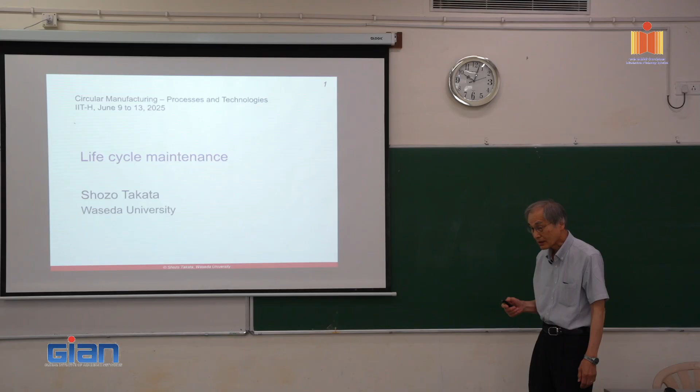Good morning, everybody. In the program, the title of my talk today is life cycle management. But maintenance is a part of life cycle management, and a very important part of it. That's why I'll focus on the maintenance issues.

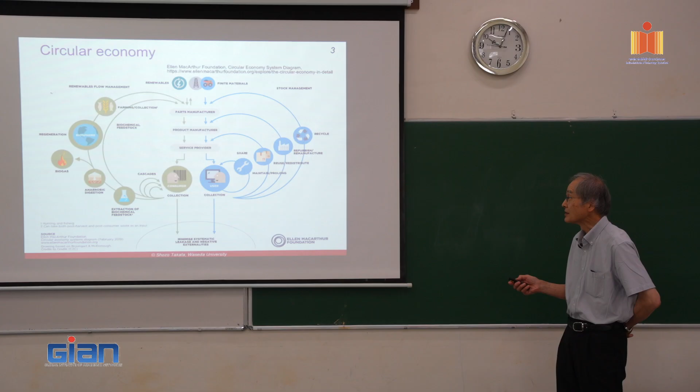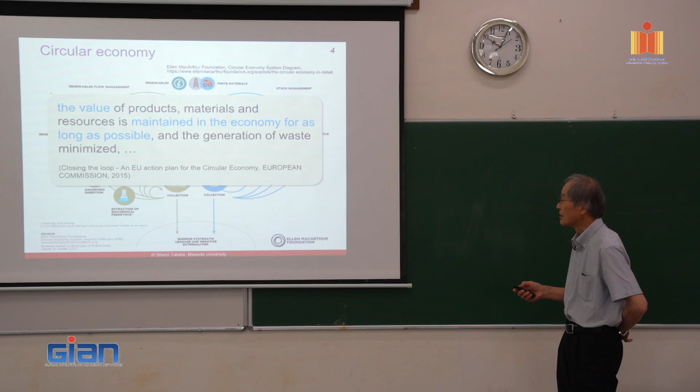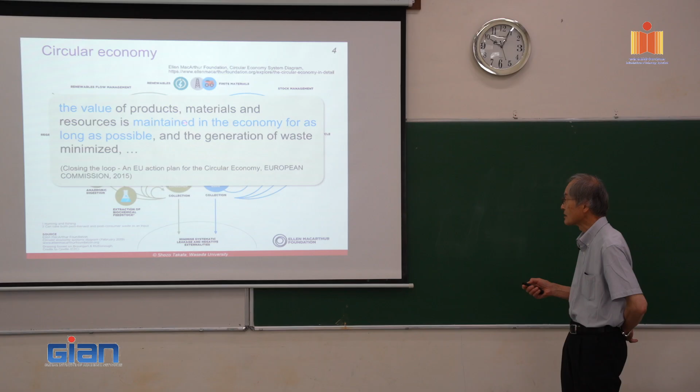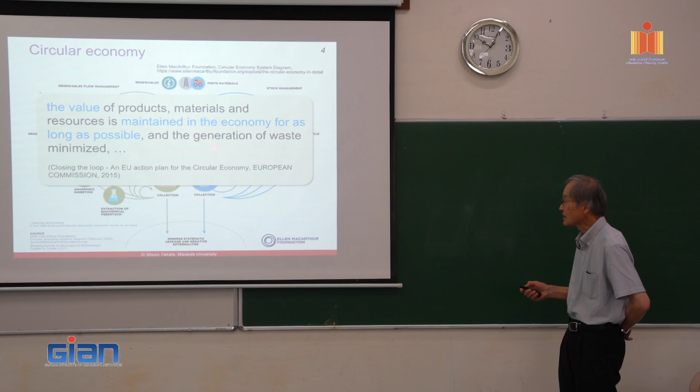This is something I've shown many times in my presentation, and the circular economy was stressed by an EU action plan for the circular economy. This is a very famous paper saying that the importance of the circular economy, and in this document there is a description: the value of product, material, and resources is maintained in the economy for as long as possible, and the generation of waste minimized. So this says that maintenance is a very important part of the circular economy.

There are many kinds of artifacts or things to maintain, and maintenance is aimed at making best use of artifacts through their life cycle. So how can we extract the capability of the products or facilities, regardless of the area - infrastructure, industrial machines, home appliances, and so on.

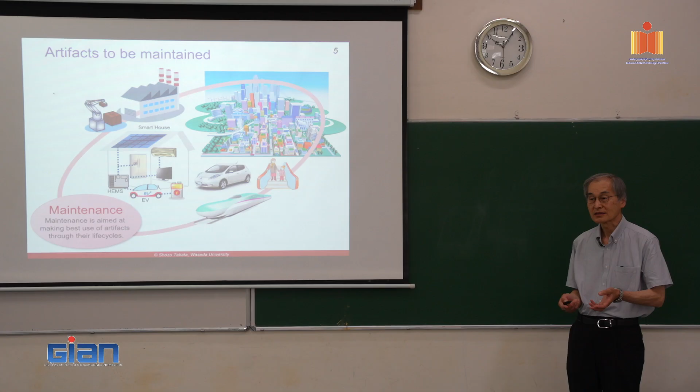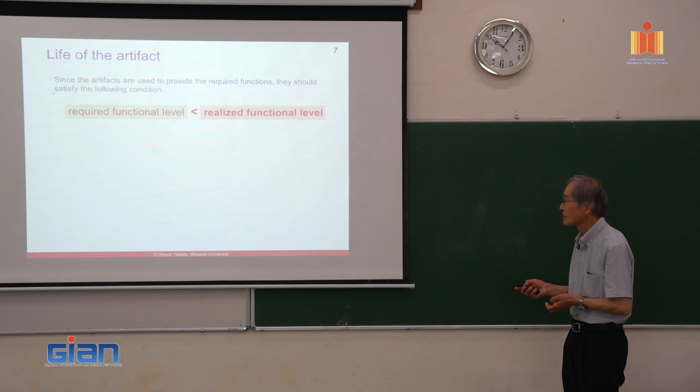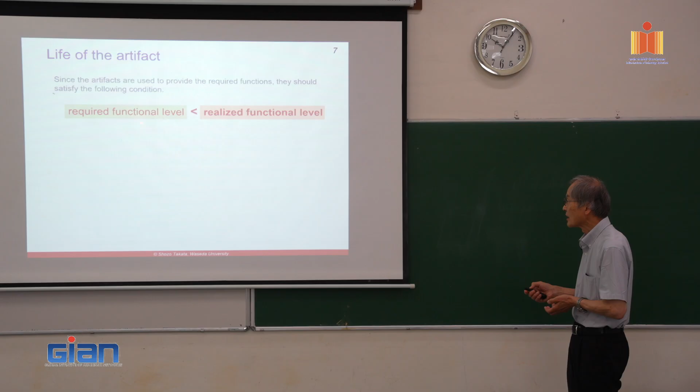First, I want to talk about the framework for life cycle maintenance. There are two kinds of lives of the artifact, and the artifact is required to have a good functional level larger than the required functional level. So the realized functional level should be higher than the required functional level.

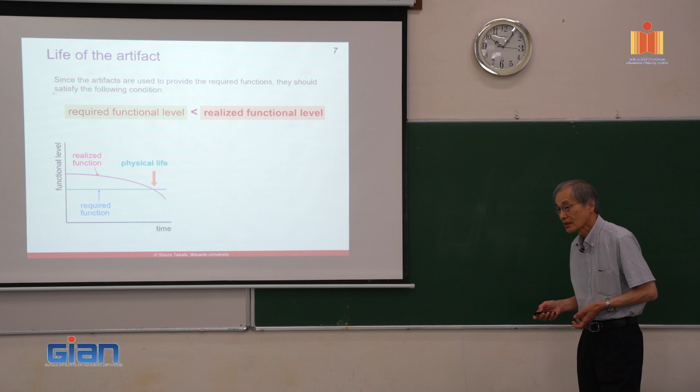There are two cases where the realized functional level goes under the required level. One reason is the deterioration of the product or facility. The other case is that although the realized function deteriorates, at the same time, before it goes down, the required function goes up. In this case, we say the life is physical life, and in this other case, functional life or value life.

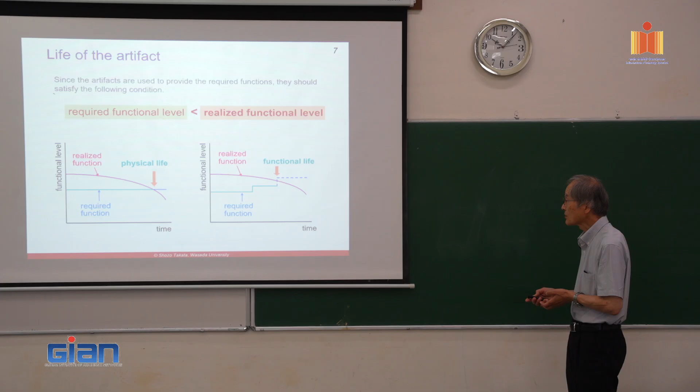So what are maintenance activities? Usually, when the system starts to be used, there could be different kinds of malfunctions or failures or not-good things, and you need to improve it to a usable stage. Then, while you use or operate the product or facility, it could deteriorate - the function level will deteriorate.

But before it goes below the required level, if you make some kind of treatment, that is called preventive maintenance, or PM. On the other hand, if the treatment happens when the function level goes below the required level, which means failure, then we call that kind of maintenance breakdown maintenance.

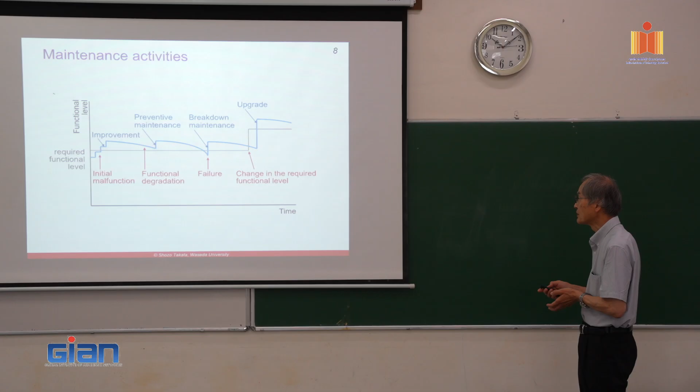Also, there is a case where the required level increases, goes up, and for responding to this type of change, you need improvement or upgrade. All these activities to respond to these kinds of events are called maintenance.

But why do we need maintenance? There are several kinds of reasons. One is expected deterioration - from the design of the product or facility, this component may deteriorate due to the operation or due to the usage.

Think about the tire of the car. If you drive a certain amount of distance, then the tire wears and you have to replace it. This is not a bad thing - this kind of deterioration is already predicted at the design stage of the car. Of course, you may make very long-life tires, but then the tire may become very heavy or very expensive, and this is not the economic solution.

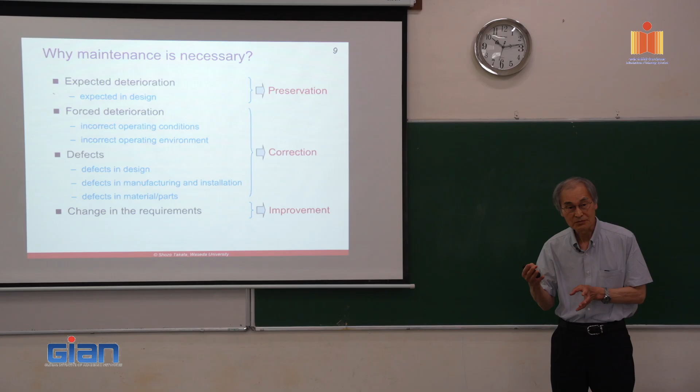Also, sometimes you need improvement because of a change in requirements - the required functional level goes up. In the case of manufacturing, the product will be changed, and that causes a certain kind of impact to the machines. Then you need to improve your machines, improve the strength or speed of the machine, and so on.

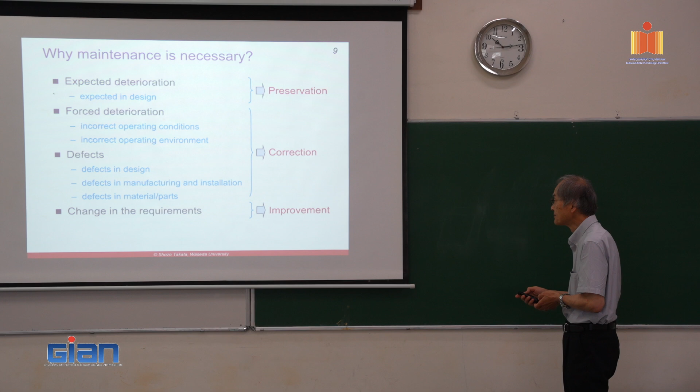If you have to manage the life cycle of just one thing, it's not so complicated. For example, a knife used for cooking will deteriorate due to usage, but you only have to manage one life cycle. In many products, however, there are many kinds of components, and each component usually has different lifespans or different characteristics of life. You have to manage every component to keep the product or system working.

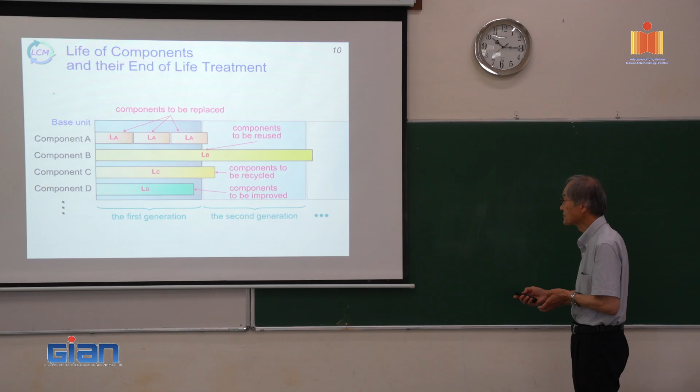This makes maintenance issues quite complicated, because one car has several 10,000 parts, and every part could deteriorate over time. So how can you manage this kind of problem?

The basic principle is you should be proactive. That means you need to predict the deterioration or failure in advance. If you don't know what will happen, you cannot consider the countermeasures. So first, think about what will happen, then prepare the countermeasures for that.

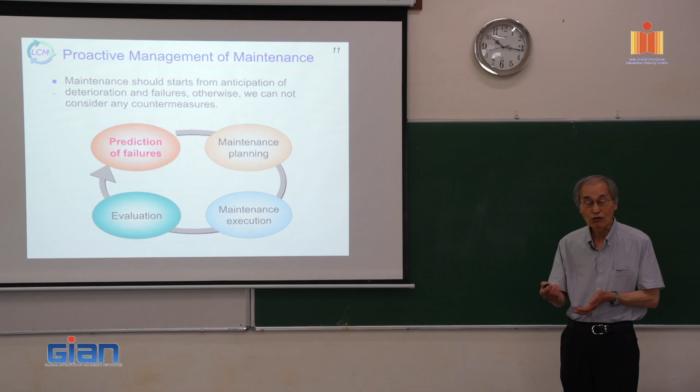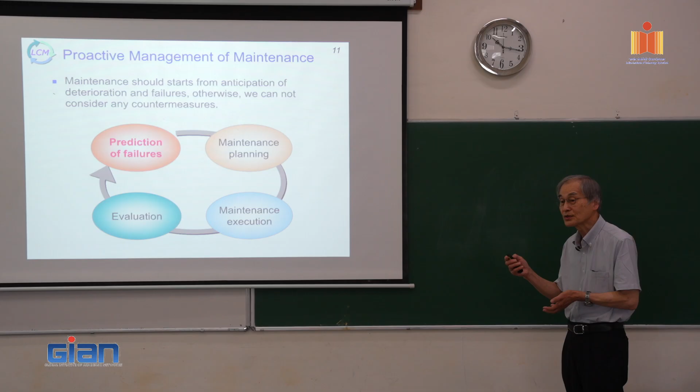However, the prediction could be wrong. You cannot say that your prediction is always precise. So in that case, you need to improve your prediction, or revise your prediction and improve the maintenance actions.

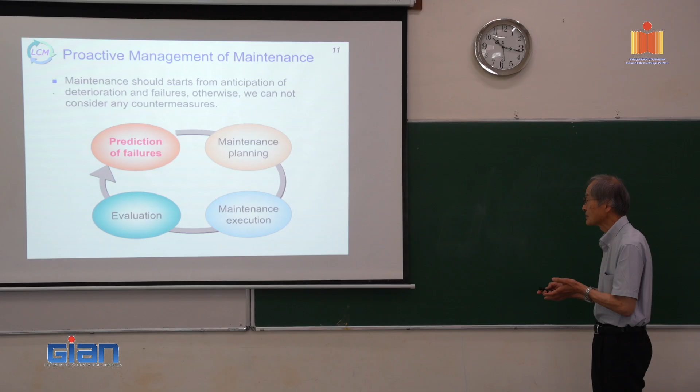So in this way, you need to have this kind of circle, a management circle, an improving circle. This chart shows this kind of managing loop. The first loop is a maintenance task execution management loop.

First, you need to plan the maintenance task, and then execute the inspection, monitoring, diagnosis, and treatment. And you need to evaluate the result of the treatment, to see if the condition of the product or facility is what you expected.

In that case, maybe you can improve the way of maintenance or the way of inspection, and continue to execute this kind of route. But sometimes what you expected is quite different from the actual condition change.

In that case, you need to revise your way of maintenance, that is, the maintenance strategy. So you need to go back to the maintenance strategy planning phase, and again predict or consider the deterioration and failures, and then determine what is the effective way to maintain or inspect against these failures or deterioration. So this is the second, maintenance strategy planning loop.

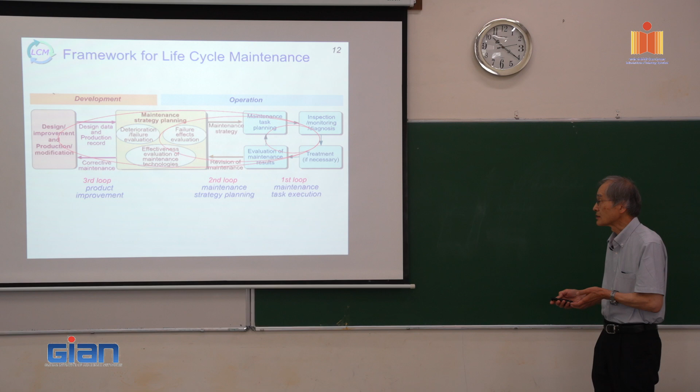In this chart, the most important point is maintenance strategy planning. Next, I want to speak about maintenance strategy planning.

First, we have a categorization of maintenance strategy. The usual categorization is that maintenance strategy is divided into preventive maintenance and breakdown maintenance. And preventive maintenance is divided into time-based maintenance and condition-based maintenance.

Time-based maintenance means that when you operate the machine for, say, 1 year, then you may replace some parts. This kind of maintenance is time-based maintenance. Of course, it can also not be based on clock time, but on the total driving distance. When it reaches 10,000 kilometers, you need to replace something, like the oil, and so on. That's this kind of maintenance.

And condition-based maintenance is where you apply treatment such as replacement or repair based on the conditions which are inspected or monitored by some means.

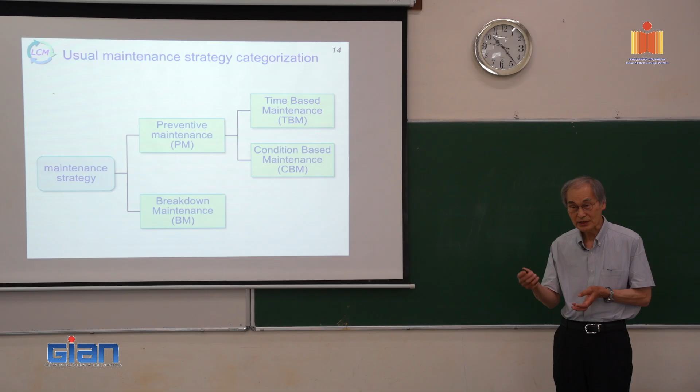But sometimes there is some kind of confusion. When you make an inspection periodically, like every 6 months, people sometimes say that this is a kind of time-based maintenance. But time-based maintenance does not mean periodical inspection—it means periodical treatment, replacement, or repair.

Therefore, I am proposing the categorization of maintenance strategy in 3 axes. One is the criteria for applying treatment, another is the occasion or interval, and the third is the method of treatment.

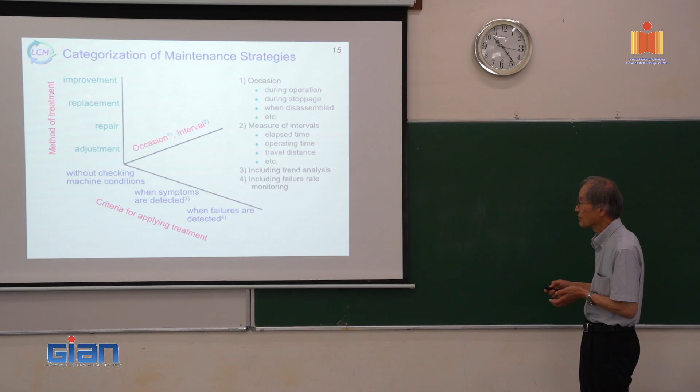Criteria for applying treatment: one is time-based, one is condition-based. Time-based means applying treatment at a certain interval without checking the machine condition, regardless of the machine condition. If you know the life of the component exactly, then it is an efficient way.

Condition-based maintenance is applying treatment based on the condition of the product or facilities. And in definition, breakdown maintenance is also included in condition-based maintenance, but sometimes, or many times, breakdown maintenance is defined or treated as a separate maintenance strategy.

But in definition, breakdown means applying treatment after failure condition.

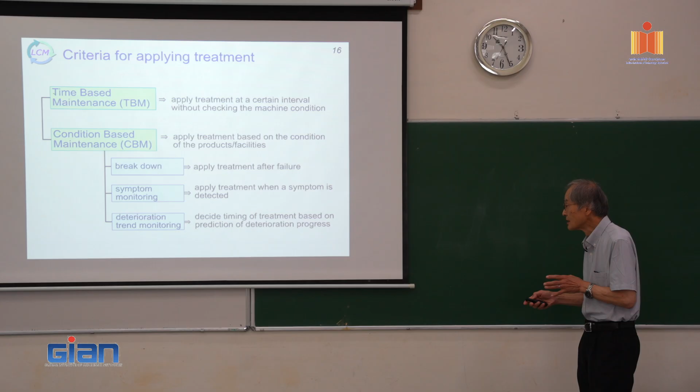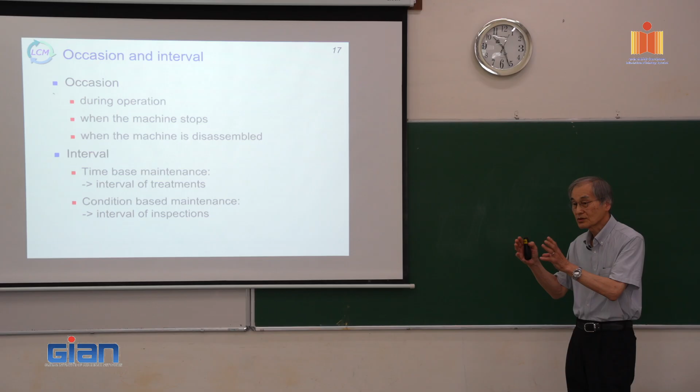Another axis or item of the categorization is occasion and interval. Occasion means during operation, when machine stops, or when the machine is disassembled - whether it is treatment or inspection. Sometimes you can inspect the machine condition during operation, such as vibration monitoring, but sometimes you need to stop the machine to check the oil and so on, and sometimes you need to disassemble the machine to check the wear condition of the bearing and so on.

Interval means, for time-based maintenance, the interval of treatment, and for condition-based maintenance, the interval of inspection or monitoring.

Method of treatment: there are many kinds of treatment, but they are categorized into three: recovery of deterioration - adjustment, repair, replacement; mitigation of stress - cleaning and oiling, improving operating conditions to reduce the stress; and elimination of cause of deterioration - changing the material, changing the structure, and so on.

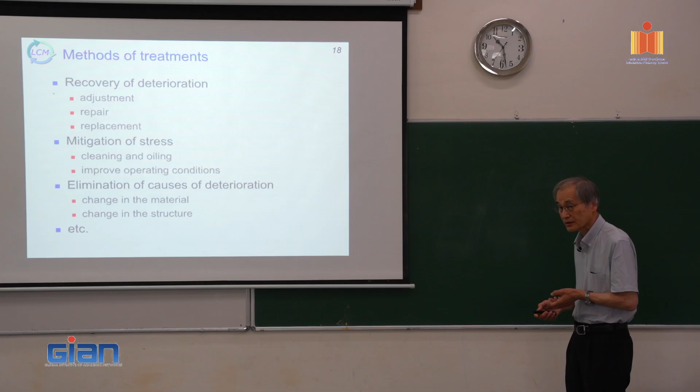So how can we make a maintenance strategy? You need to think about two factors. One is the technological factor, or technological evaluation, which means understanding how the machine will deteriorate and how the machine fails.

There is a stress from outside or from internal, and this kind of stress causes the deterioration of the parts or component, which leads to unit failures or unit functional deterioration, and then system failure or system functional deterioration. So there is a certain kind of mechanism of this phenomena you need to know.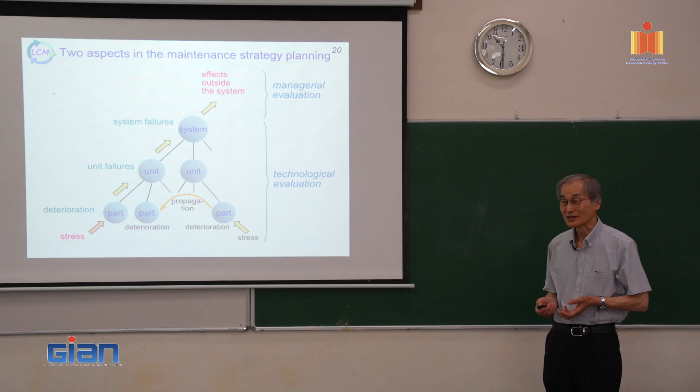Also important is evaluating the impact of this failure or deterioration. For example, if one of these lights fails, it does not affect the continuation of my lecture. But if this projector fails, I cannot continue my lecture. So the impact to my lecture is quite different depending on the role of the component or the role of the machine.

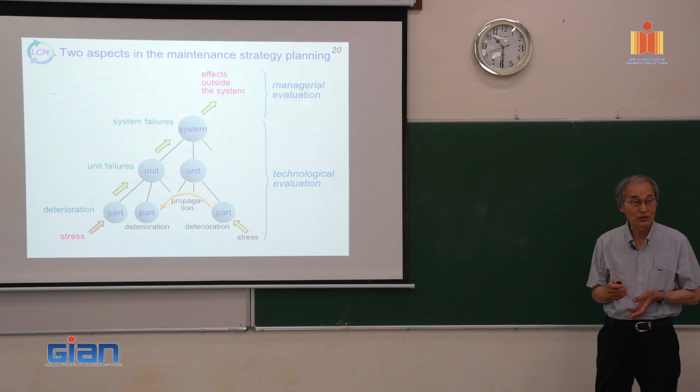Therefore, in making the maintenance strategy, we need technological evaluation for selecting technologically feasible strategies. At the same time, you need managerial evaluation, which is prioritizing the maintenance object - what is more effective, and so on. Then you can select the criteria, kind of treatment, timing, and cycles.

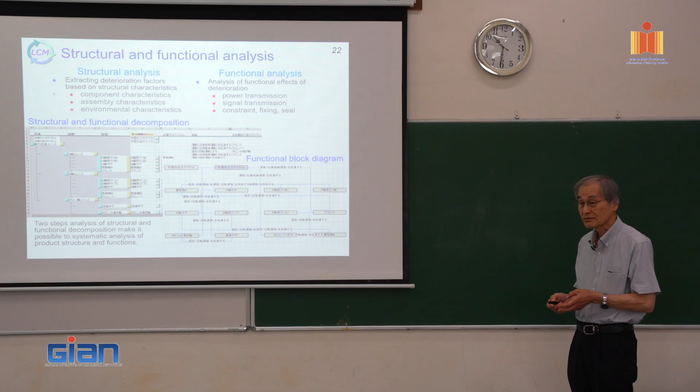For technological evaluation, you need to know the structure and functions of the machines - what type of structure does it have, or what kind of function they have. Also, you need to look at each component and how they deteriorate, how they fail.

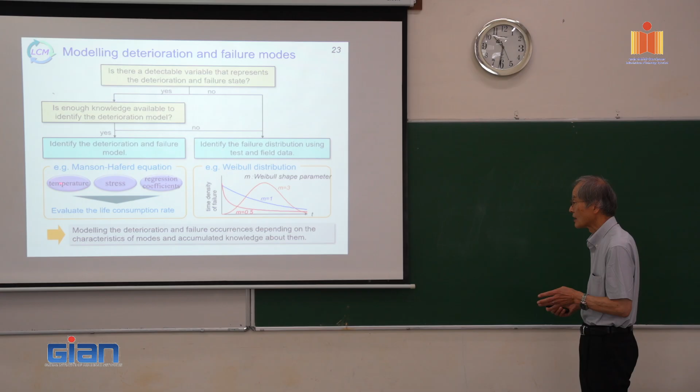If you have good knowledge about the failure, you can model the deterioration or failure phenomena in terms of a physical model or a statistical model, depending on how much knowledge you have about the failure or deterioration.

What we want to know is the progress pattern of the deterioration and failure state. The state is divided into 3 stages: a normal state, nothing wrong; a symptomatic state, where there is some symptom of deterioration or failure, but still usable - the machine is usable; but if the functional level goes below the functional limit, then it's a fault state, meaning you cannot continue to use it anymore.

So the question is whether you can predict this timing, the start of the symptomatic state or the start of the fault state.

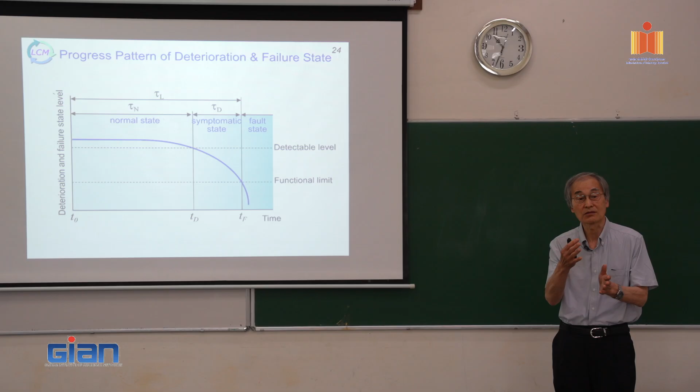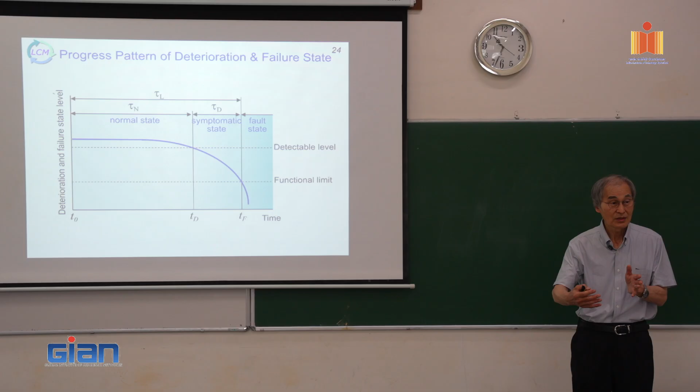Or also you need to know how long this state lasts. If the failure occurs quite suddenly, prediction or detection of the symptom does not make sense, because you don't have enough time to react or prevent the failure. So if the failure occurs quite suddenly, condition-based maintenance cannot apply.

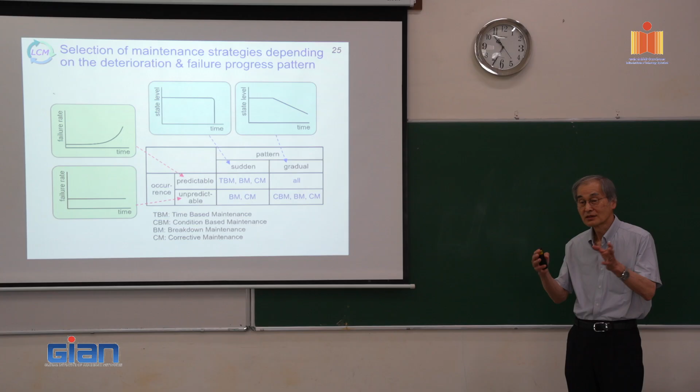But if the deterioration progresses gradually, then you can have a chance to get the symptom of the failure. Also, if you know when it fails, then the failure is predictable, and you can apply time-based maintenance. But if you don't know when it fails, so that it can fail now or one year later, then time-based maintenance doesn't make sense. So you need to know the characteristics of the deterioration or the failures to decide what type of maintenance strategy can be applied to this kind of component.

And for managerial evaluation, you need to evaluate the effect. There are different kinds of effect. For example, in the case of manufacturing facilities, there's the quality aspect, cost aspect, time aspect, and the effect to the human, machine, material, environment. So you need to enumerate every category of the effect.

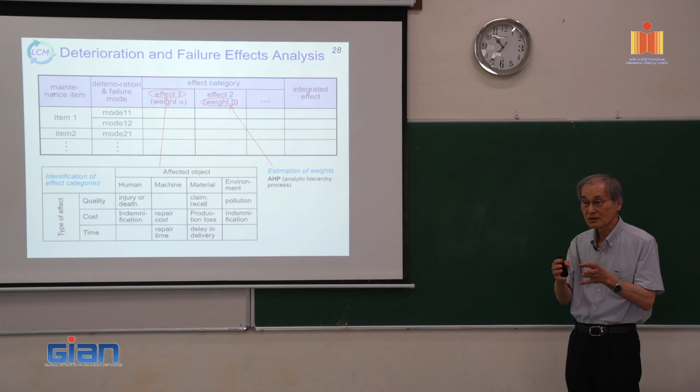Then evaluate the stress, the amount of stress of these effects. And then some effect can be measured by money, cost, but some effect can be, for example, injury, which cannot be directly assessed by money. So in that case, you need to weight each effect to integrate them into one measure, the impact or effect, to evaluate the effect of this failure and so on. So the effect should be estimated for each failure.

So these are the very basic items to be considered in maintenance strategy planning.

In many cases, people say that the characteristics of maintenance differ from one industry to another. Of course there is a field of maintenance, but sometimes maintenance is discussed in construction, the architecture area, or the mechanical area, or the airplanes, aeronautic area, and so on. So each industrial or product area, within that kind of field, maintenance is discussed, and sometimes they don't communicate with each other. That is a big problem of maintenance management.

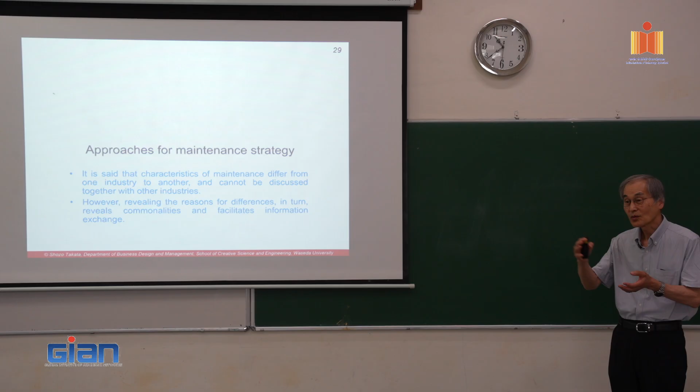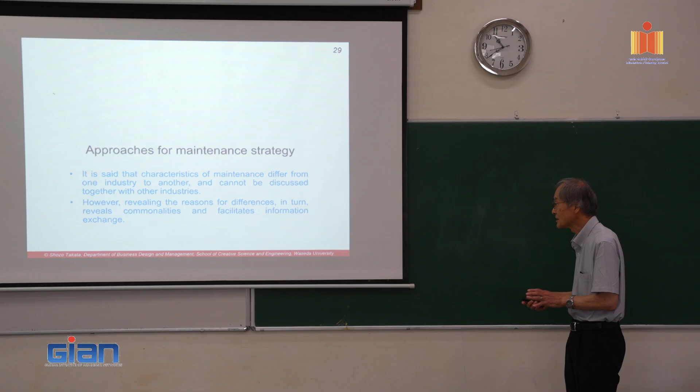But if you know what is different, if you can reveal the reasons for difference, then you can know what are the commonalities, what is a common issue in maintenance even though the area is different. So that's why I'm trying to categorize the approaches or focusing points of maintenance. First, I categorize the effect of the failures.

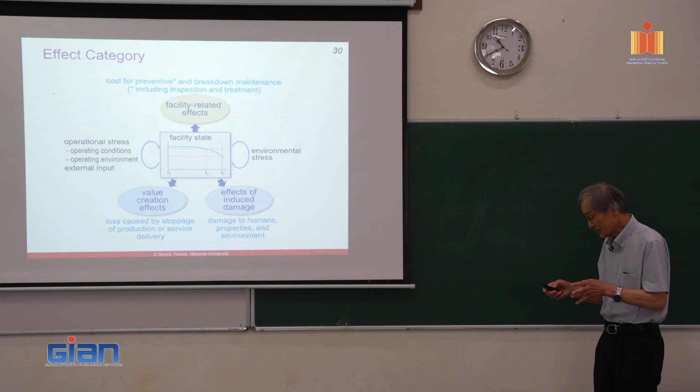It is categorized into facility-related effect, meaning the cost of preventive maintenance or breakdown maintenance. Another one is value creation effect. Value creation effect means that when the manufacturing machine stops, you cannot produce the product, and then you have some loss, because you cannot produce and sell the product. In this case, the loss is categorized as the value creation effect.

And also another one is the effect of induced damage. Some failure of the plant will cause fire or explosion that breaks adjacent machines or injures humans.

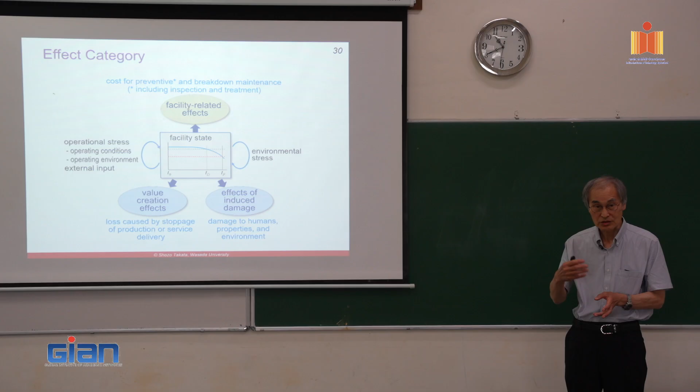Another point is the cost types. When you apply maintenance, how much cost do you need? Ideally, if the treatment is replacement, the cost of the item does not change regardless of when you change the component. But if the treatment is a kind of refill type, then the cost increases in proportion to the deterioration, the level of deterioration.

And there's another type, repair type. For example, concrete structure: if you let it deteriorate into a very bad condition, then you need a lot of money to repair it. But if you apply the treatment at an appropriate timing, then you don't need so much money for that.

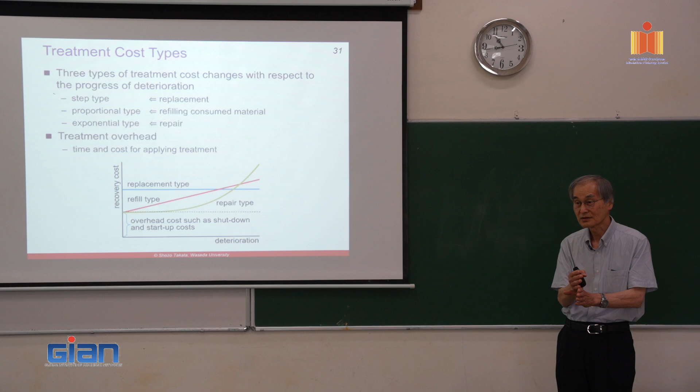Another point is you need to think about the overhead cost. That is very important because if you have a furnace for heating some material, if you want to maintain the inside of the furnace, you need to shut down, but it has a high temperature and you need to wait for it to cool down. After repair, you have to start up, and it takes time to reach a certain level of temperature. So during that time, you have to stop your production activity, which makes a big loss.

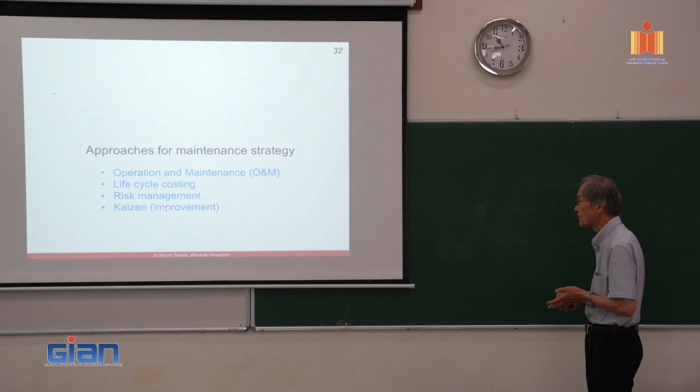So with these two items, I can identify four types of approaches. One is operation and maintenance. The operation and maintenance interaction becomes a major issue in maintenance management if the dominant effect category is value creation and the overhead cost is big.

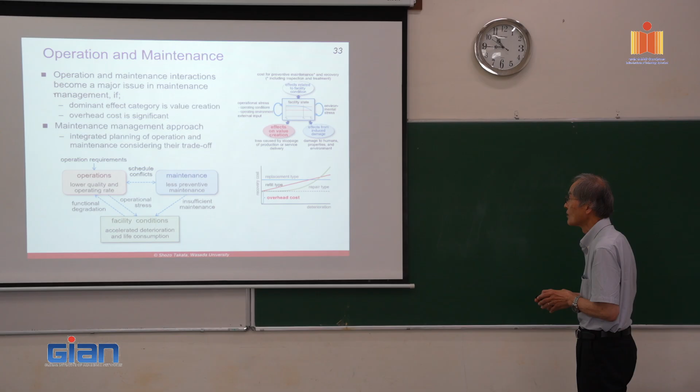If you put the stress on the operation, then you cannot apply the appropriate maintenance. That causes deterioration of the facility, and then that affects the quality of the material, quality of the product, or the yield of the production. So you need to compromise between maintenance and operation. That is the so-called operation and maintenance integration problem.

Another type is life cycle costing. Optimization of life cycle cost becomes a major issue in this maintenance management. If the dominant effect category is facility related and the treatment cost category is repair type, timely application of treatment based on proper identification of the facility condition is very important in this case. So you need to think about the life cycle cost.

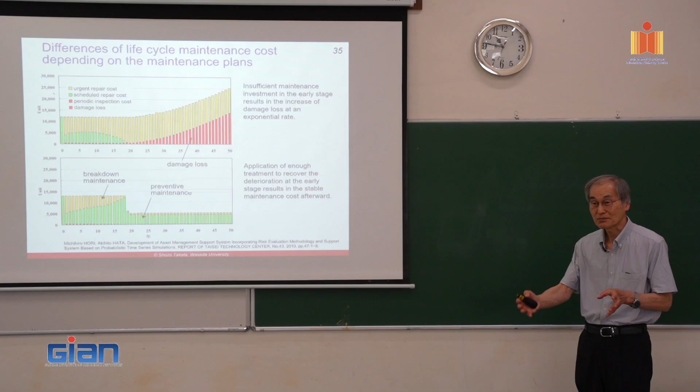For example, this is a result of the simulation of concrete structures. If you don't put appropriate effort or enough money to repair the defect at the early stage of the life cycle, then the cost will increase gradually. But if you put enough money to eliminate the problem, then you can have a stable cost profile during the life cycle. So this is quite important. Just letting it deteriorate makes a big loss.

Another one is risk management. If the dominant effect category is from induced damage, a single failure, not necessarily single, but anyhow even a single failure induces enormous effect, such as explosion and fire and so on. In that case, you need to assess the risk, which is the amount of the effect multiplied by the chance of occurrence of the phenomena.

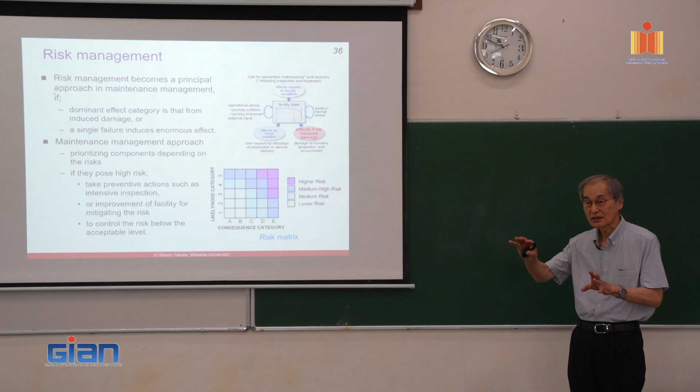In this case, you need to take preventive action to reduce the risk by improving the facility, or control the risk below the acceptable level. This kind of approach is called risk-based maintenance. The method is quite established, especially in the area of chemical or oil plants. First it was applied to the nuclear plant, and then the application area expanded to other plants.

The final category is kaizen, or improvement. If the dominant effect category is value creation, there are many different types of machines, and the overhead cost is not significant. This type can be found like in an automobile factory, where there are so many kinds of machines and so many kinds of fault failures. So when it occurs, or when it is predicted, you have to apply action to prevent the reoccurrence of the failures.

In the assembly line of car manufacturers, if you find anything wrong, then stop the line, apply the treatment, and then restart it. This is quite important. Rather than making a defective product, it's better to stop the line and apply the treatment to recover the problem.

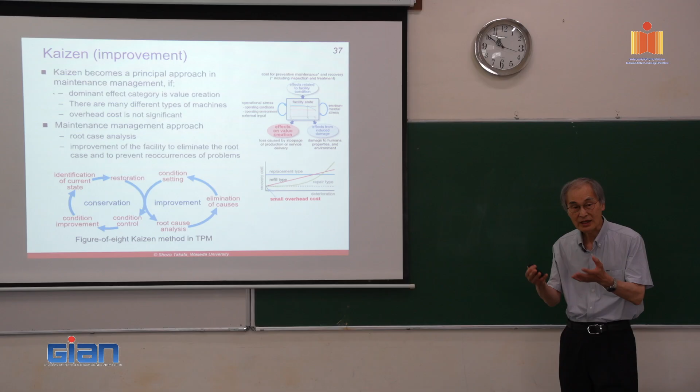The principle of maintenance is the same, but what is important is a bit different depending on the characteristics of the plant or the machines. If you understand what is different, then you can talk with each other. That is a very important approach, I think.

I cannot cover everything, so I just picked an example of the O&M optimization program as one of the types of maintenance approaches. This is a case of semiconductor manufacturing, and this case is a bit old, but anyhow the concept has not changed even now.

What we think is a semiconductor manufacturing facility, such as dry etching equipment. This equipment should maintain the vacuum condition, but if you continue to operate, then there could be particles inside the chamber. The production process generates particles, and the particle could make a defect of the product, in this case the wafer. The particle generated by the process adheres to the wafer and causes yield reduction.

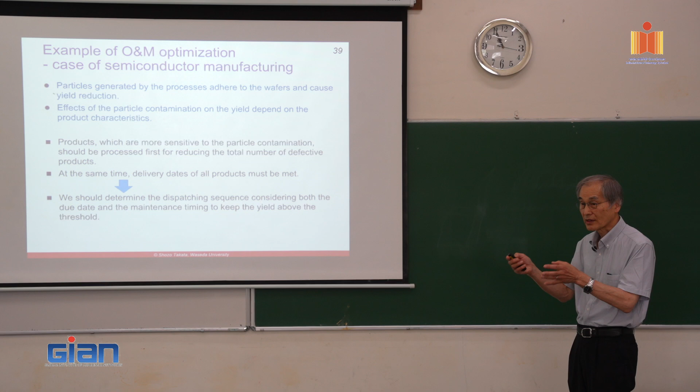So we should determine the dispatching sequence considering both the due date and the maintenance timing to keep the yield above the threshold. How can you make a schedule considering the operational requirement as well as the maintenance requirement? That is the issue.

As I told you, product one is more sensitive to particle contamination, so here you need to apply the maintenance. Product two is less sensitive, and the timing of the maintenance can be longer than in the case of product one. So this means that first you produce product one and then product two.

In this case, the number of defective products is 630. But if you first produce product two and then product one, the defective products increase. So the sequence is quite important.

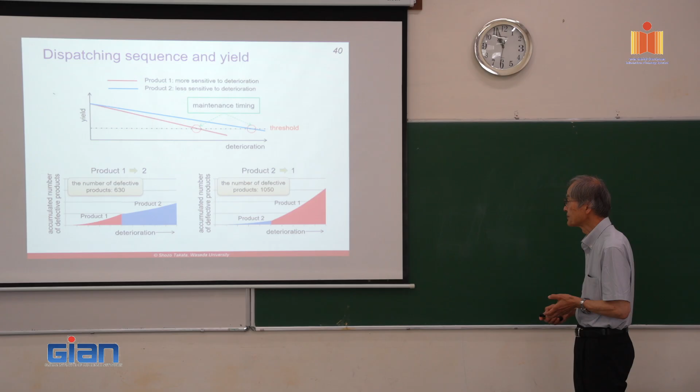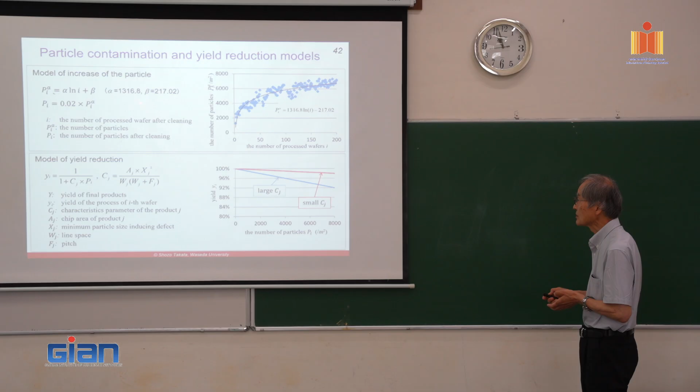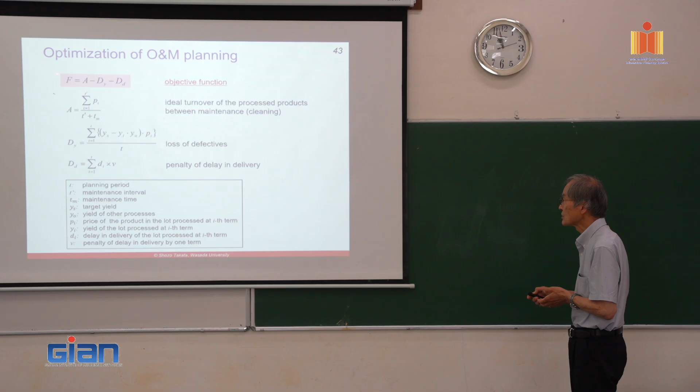We use a model of increased particles, a model of yield reduction. Then we have an objective function where A is ideal turnover, dy is the loss from defectives, and dd is the penalty for delay in delivery. We want to maximize f, and for the optimization we use the so-called genetic algorithm.

Do you know something about GA, the genetic algorithm? It's a mimic of the behavior of genes. The genetic algorithm, which we call GA, mimics the genetic mechanism of how crossover happens in the progress of human beings, or in nature.

I don't have enough material to explain what genetic algorithm is in detail, but if you Google it, there is a lot of information about that. This is quite a common approach these days to solve combinatorial problems, and it has also been applied many times to production scheduling problems.

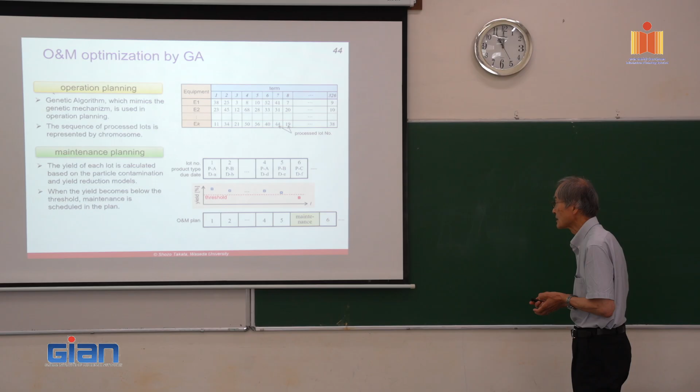Anyhow, this kind of problem is an example of the so-called operation and maintenance optimization. Again, this kind of maintenance strategy should be assessed, because as I told you, there are many kinds of components, and for each component you need to select the maintenance strategy and combine them to apply these maintenance activities.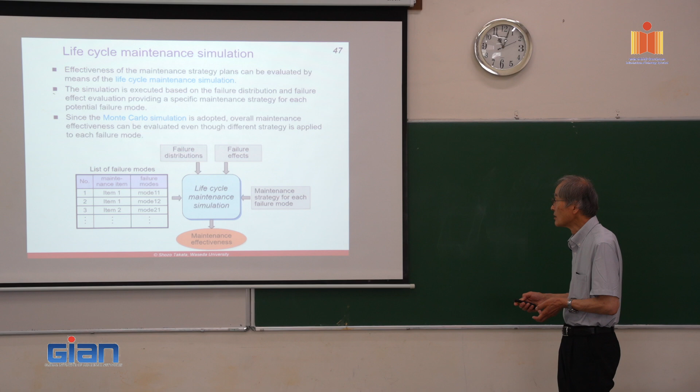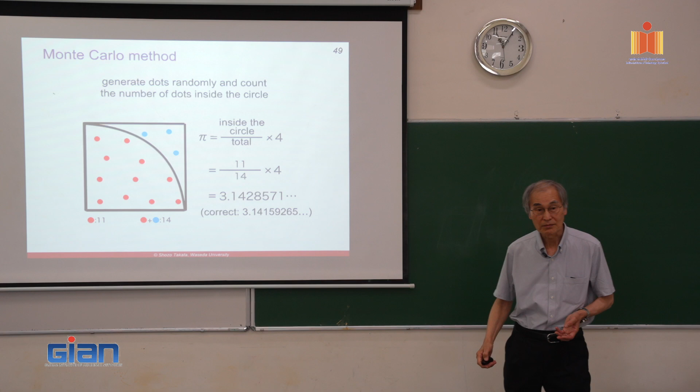Using this technique, if you know the distribution of failure occurrence, then you can simulate the maintenance.

For example, this is the case of breakdown maintenance. By using this distribution with a random number, you can determine the timing the failure will occur. If the failure occurs, the part will be replaced or repaired, and the distribution will shift by this amount, and then next time. Continuing this calculation, you can determine how many failures will occur and how many treatments have to be done during a certain period of time.

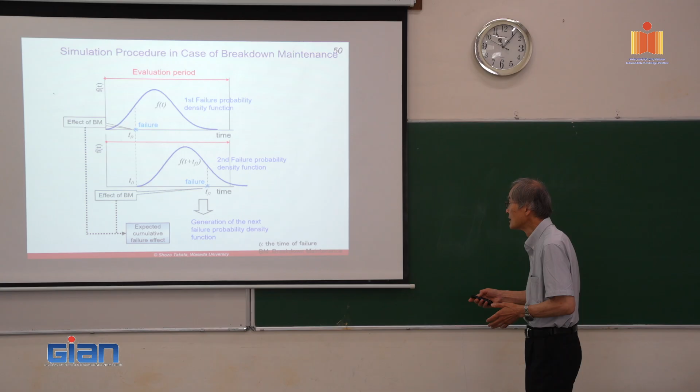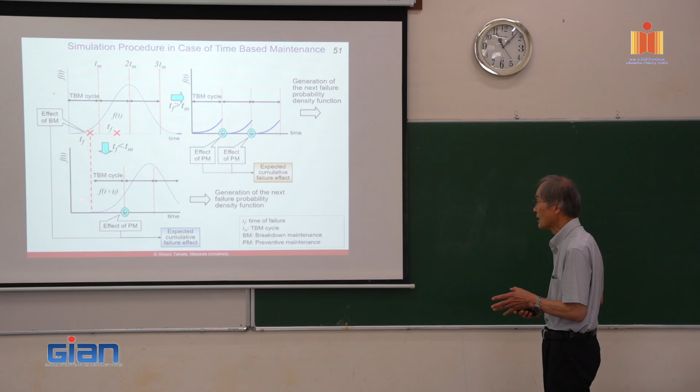And for time-based maintenance, first you generate the timing of the failure. If the timing of the failure is before the maintenance timing, then you need to make a breakdown maintenance. But if the generated timing of the failure is after the maintenance, then you can prevent this failure. If you make a treatment, you can generate the next failure distribution, and so on.

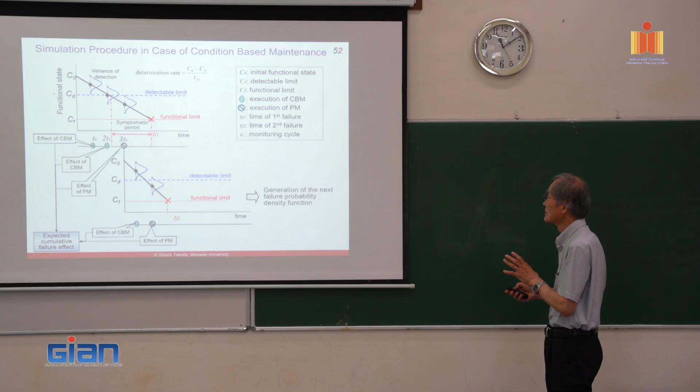Of course, there is some certain kind of uncertainty, so you need to apply this kind of distribution function. But anyhow, if you can detect it, first you need to identify the functional limit, and then identify the timing of detecting the symptom. Then, applying some kind of treatment, you should revise the deterioration curve and so on. So this is a way of simulation for condition-based maintenance.

And there's another approach. What I explained was the statistical approach, but if you know quite well about the mechanisms, then you can simulate the failure or the deterioration using the mechanical properties. So this is an example of the simulation of the robot.

Usually the failure will occur in the joint of the robot. But if you know the program of the robot, then you know the behavior of the motion of the robot. From the motion of the robot, you can calculate the force and moment applied on the joint. If you know the joint mechanism, maybe you have gears in the joint, then you can calculate how much stress is applied to the surface of the gear, the contact pressure or sliding length. From that, with a certain kind of model, you can calculate how much wear will occur in a gear.

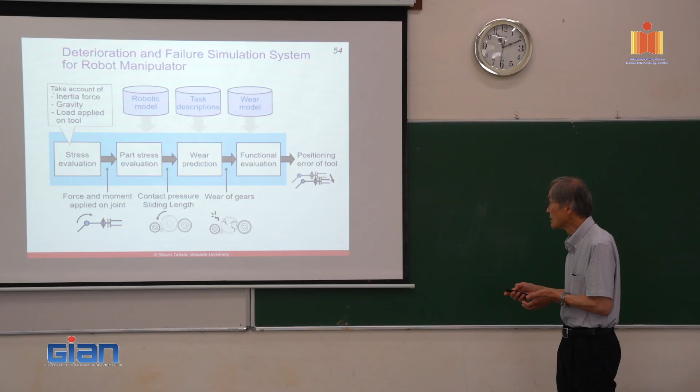Then that wear causes the positioning error. This is the estimated amount of lost motion. Lost motion is, if you have a backlash in the gear, when you move this way and then want to return it, there is a certain range where the motion doesn't work because of the backlash. That is called lost motion.

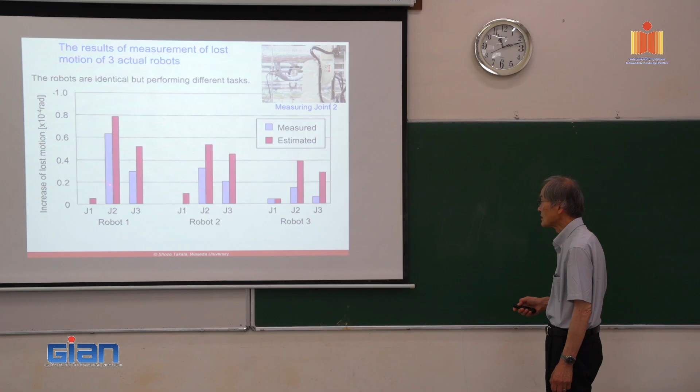We measure this kind of lost motion in the actual robot in the plant, and we also calculated the lost motion using the model. The absolute value differs from each other quite significantly, but the overall tendency agrees with each other quite well.

So by using this kind of system, you can adjust or find the way of motion which leads to less wear. Again, we apply the genetic algorithm for optimization, and this number is a joint number. One is this motion, two is this motion, and so on. In joint 2, it has the biggest wear, and this is the original motion.

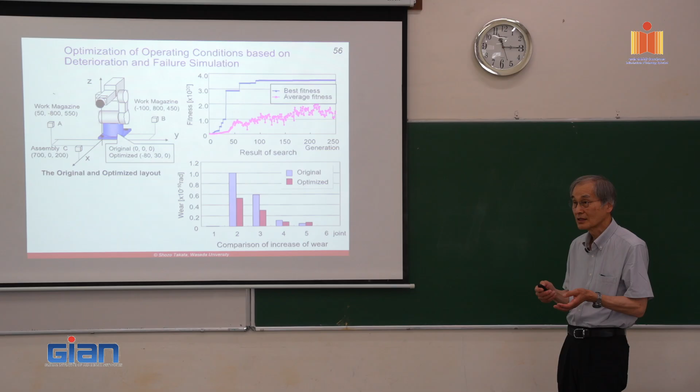If you optimize the motion, then you can reduce the amount of wear. Because if you stretch your arm, then you need to rotate it. This rotation is necessary for changing the position, but the torque on this joint is larger. If you shorten your arm, you need more rotation for changing the position, but there's less stress only on the arm. Considering these differences, you can adjust or optimize the operation or movement of the robot, and that makes the robot more reliable in terms of wear.

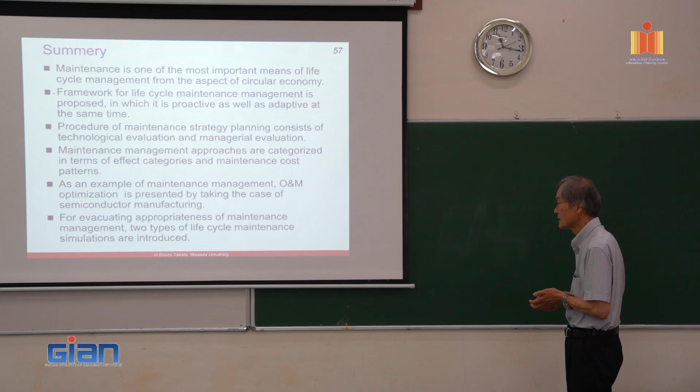As an example of maintenance management, O&M, operation maintenance optimization, is presented by taking the case of semiconductor manufacturing. For evaluating appropriateness of the maintenance management, two types of life cycle maintenance simulations are introduced. Okay, thank you very much.

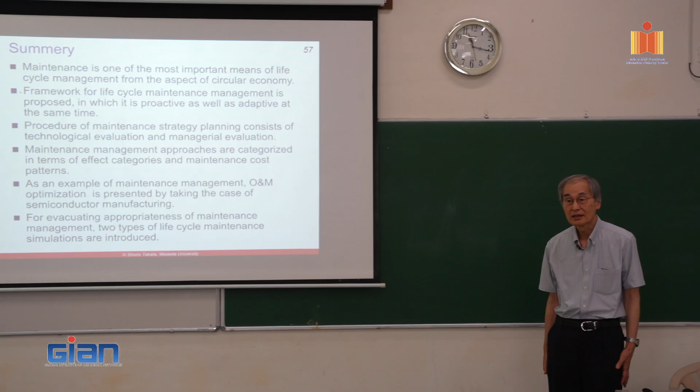Any question? I just want to add one thing.

The simulation, Monte Carlo simulation, is one kind of approach, but one more approach which is very prominent is, first of all, we study the external pattern, because all the external factors, whether power default or no proper supply of power, or maybe there might be a defect in proper fuel, which is affecting the functionality of the machine.

So if we study, or maybe because of no proper temperature, the machine needs a vacuum space. So first of all, we should consider the external factors which are affecting the functionality of the machine, which is directly connected to the internal functioning.

So this top-to-bottom approach, maintenance can also be categorized this way. The second example, you need mechanisms of the deterioration of failures, or

in that model you can consider the different external factors, internal factors, and so on. So you need some certain kind of model to describe the behavior of the component or the system. Then you can simulate what will happen in this operating condition, or in this environmental condition, and so on.

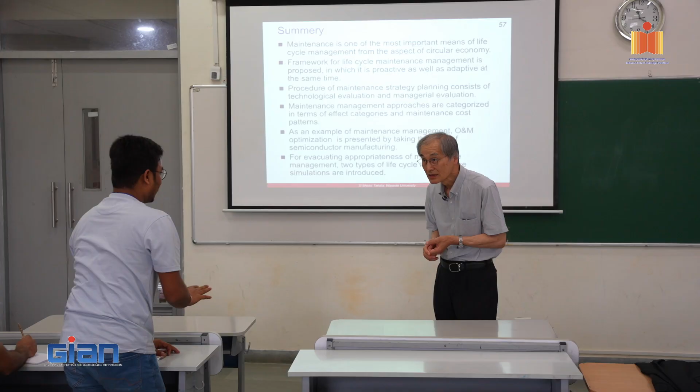Thank you for that topic. I want to comment, how should the top management encourage the people to implement this? How should top management encourage people to implement these activities, because top management only focuses on the number of products and volumes?

Currently, people are engaging only in breakdown maintenance. People are far from doing preventive or predictive maintenance. What is your comment on this?

Yeah, that's a good question. So, but I think that, yeah, you're right.

Sometimes the top management ignores the importance of maintenance. They are looking at just the production, and you have to keep your schedule and so on. But

nowadays, you know that circular economy is a big topic even for the top management, and gradually I hope that they recognize the importance of life cycle management, and that means the importance of life cycle maintenance.

I don't know the right answer for that, but anyhow, I hope that the trend of the circular economy pushes, or the people pushes the people, to recognize the importance of maintenance. So